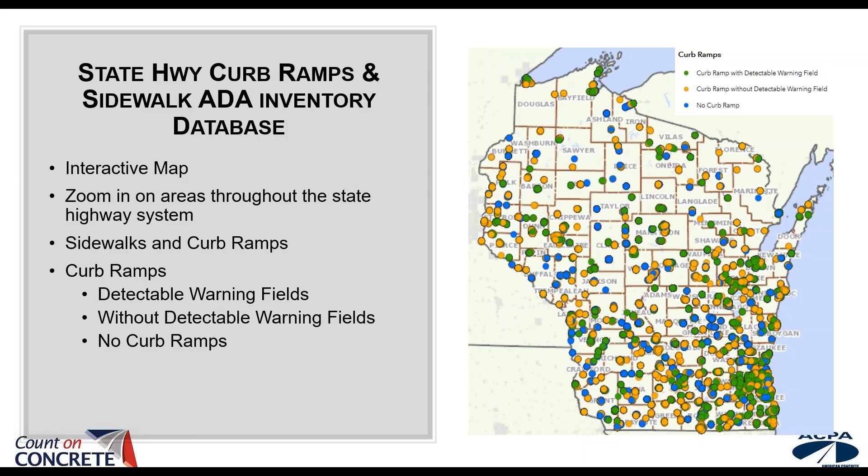The data included helps users differentiate among curb ramp features. Transportation planners also are able to use this information for insight and planning purposes.

Sometimes we need to experience things to become relatable. So if you've ever needed to use a wheelchair, crutches, or a cane, then maybe you can feel the pain some facilities can cause a person with limited mobility.

Because of this, Wisconsin implemented the 2019 transition plan. Our Secretary of Transportation, Craig Thompson, noted that WisDOT shares a great challenge with many other public entities throughout the United States in modernizing infrastructure that, in some cases, dates back generations.

He goes on to say we have established an ADA projects and compliance website for you to give input on the ADA transition plan. So as part of their transition plan, WisDOT implemented a six-year program where projects need to meet the definition of an alteration per ADA.

It's estimated that this will address approximately 6,000 curb ramp locations and be roughly about $15 million for construction costs, which doesn't include acquiring right-of-way.

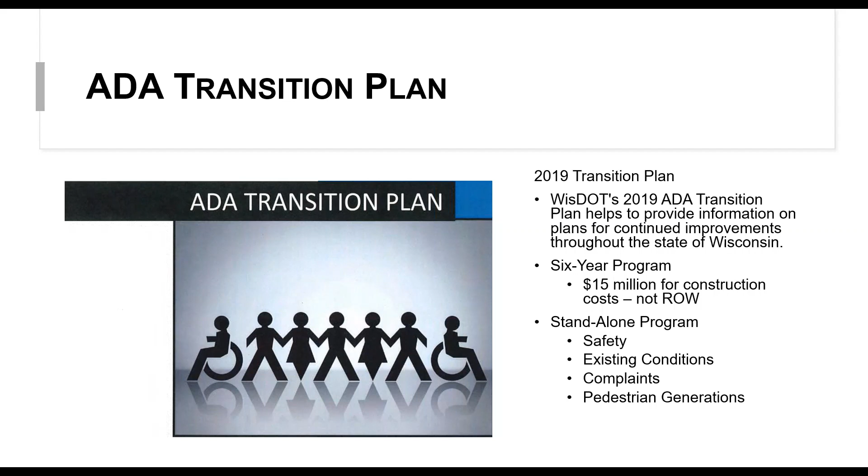Then there's a standalone program, and that's for projects outside the six-year program with prioritization criteria such as safety, existing conditions, complaints, and pedestrian generation.

Title II requires state and local governments to ensure that persons with disabilities have access to the pedestrian routes in the public right-of-way. An important part of this requirement is the obligation, whenever streets, roadways, or highways are altered, to provide curb ramps where street-level pedestrian walkways cross curbs.

This requirement is intended to ensure the accessibility and usability of the pedestrian walkway for people with disabilities. So removing barriers for travel. One place we don't usually consider a barrier is the curb.

I put this photo in here purposefully. Oftentimes we don't consider hidden or even temporary disabilities.

Have you ever injured yourself working out, or perhaps needed to replace a knee or twisted an ankle? If so, it becomes very apparent of everyday items that can become major obstacles when navigating our world with a disability.

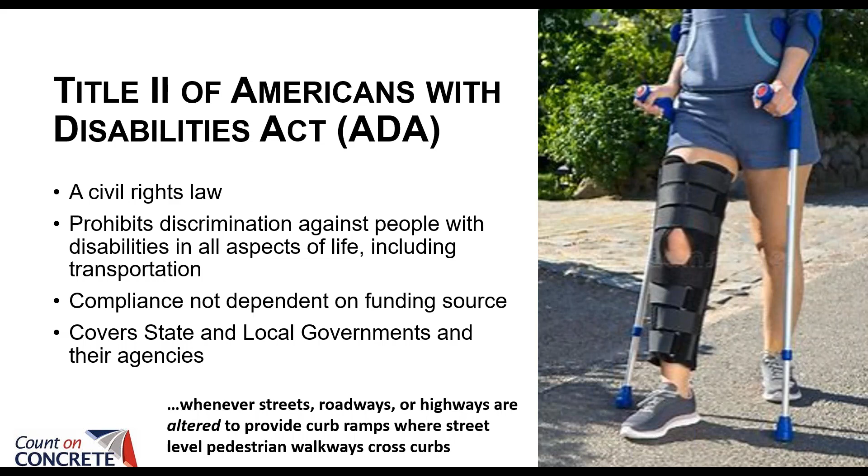So I've thrown out the word altered a few times already, and I want to dive into that a little deeper here. The guidance set forth had varied interpretations, and some questions arose regarding alteration requirements of roadway improvements, and if and when we needed to improve curb ramps.

These questions were also largely due to the development of a variety of road surface treatments, such as an asphalt overlay. Wisconsin had a front row view of what the definition of altered really meant. One of our cities had several streets that were in dire need of improvements.

In 2015, they rolled out their high impact paving program, a program to mill and overlay the entire city. When they rolled this out, they halted all reconstruction activities, which were predominantly concrete reconstruction projects, and directed all funding to the high impact paving program. In a nutshell, they overlaid a record number of streets between 2015 and 2019.

They thought that if they improved the streets, the public outcry would subside, and in general I would agree. So what wasn't considered was ADA compliance. After the first couple of years, a number of groups became vocal, and as you can imagine, it gained attention.

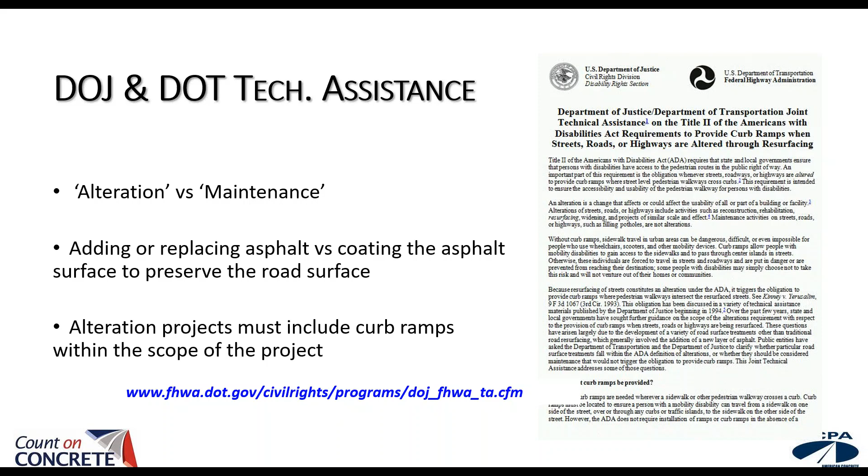I don't know all the specifics of the projects, but I know a lawsuit was involved, and several of the early projects had to go back and improve all the ramps to meet compliance. The alteration of the pavement, and not the ramp, inevitably altered the slope and then threw the ramp out of compliance. Since the suit, the design has changed and ramps were included in the alteration of the roadway.

This is what's outlined in PROWAG, alterations to existing facilities. The guidance requires alterations to existing facilities to comply with the requirements for new construction to the maximum extent feasible. Existing facilities that are not altered are not addressed unless they are included within the scope of an alteration. So altering the profile of the roadway alters the slope going into the ramp and therefore alters the existing facilities.

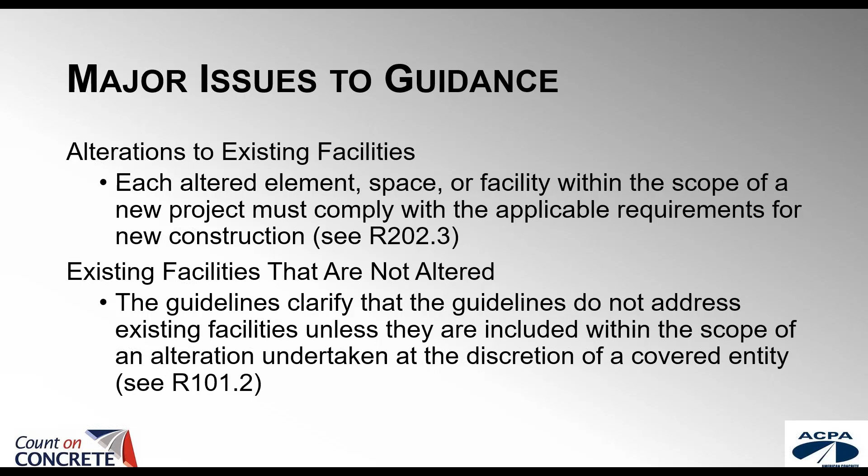Okay, let's review the guidelines for the pedestrian access route, or PAR. A minimum width of 4 feet wide - Wisconsin typically specifies 5 feet. Every 200 feet, there needs to be a space for passing that is 5 foot by 5 foot. We have a maximum of 2% cross slope.

Wisconsin uses 1.5%, and here's the reason why. On an urban construction project, one of our members was finishing a sidewalk with a 2% cross slope. The forms were placed right at 2% and checked for accuracy. The challenge arose with the finishing process. Finishing from the low end to the high end resulted in an increase of slope. In this case, the 2% slope that was verified ended up being just slightly over 2%, and when measured after operations were done, it was deemed out of specification and was issued a remove and replace order.

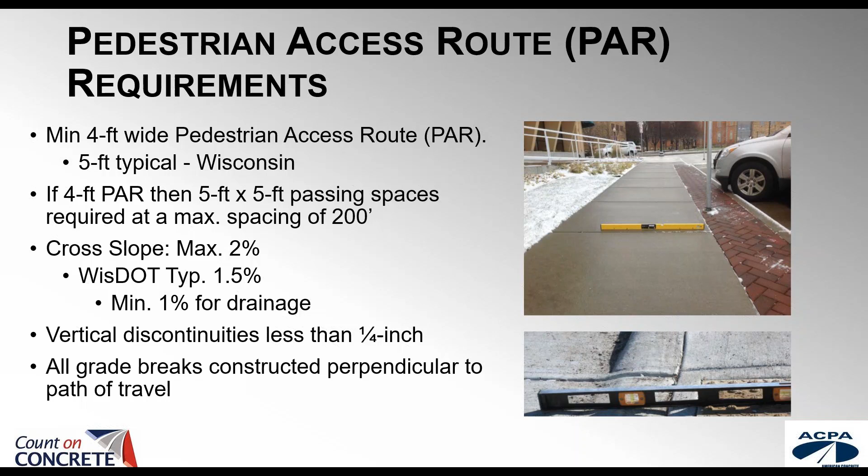Because of this example, WisDOT now details out 1.5% cross slope with a maximum of 2%. We've also found that some inspectors who may not have the experience measure a slope of 1.8% and deem it out of spec, which is inaccurate and the reason why we created that buffer. The maximum cross slope is 2% per PROWAG guidance, so the 1.8 would still suffice.

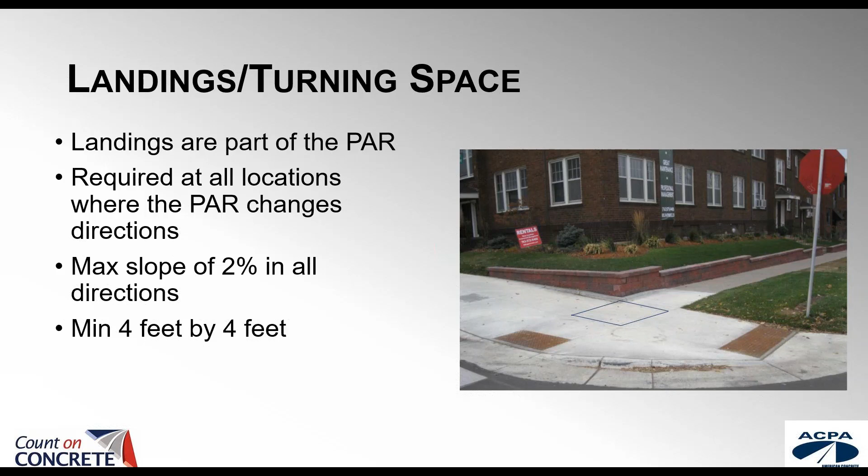All right, let's review some guidance on landings or turning space. As part of the PAR, the maximum slope of landings shall be 2% in all directions, with a minimum size of 4 foot by 4 foot as shown in this photo.

This picture shows a good example of a properly installed curb ramp that meets all ADA standards. Landing at the top with less than 2% slope in any direction, detectable warning fields installed properly, 1.5% max cross slope at intersecting sidewalks, which is the WisDOT standard. This curb ramp also has a landing at the bottom of the ramp as well.

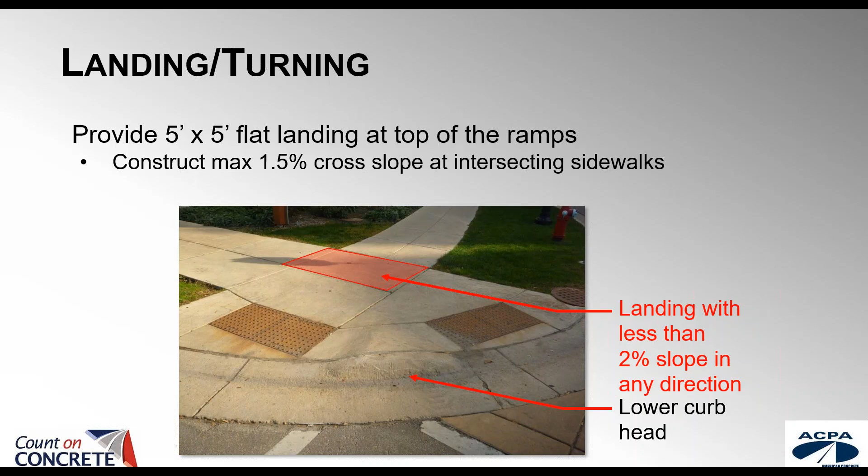This shows a nice drawing of a sidewalk and curb ramp elements. The curb ramp slope is shown at 6.25%, which is target, and 8.33% maximum. The note of special shaping right here, this gray area, is detailed out at 1.5% for Wisconsin with a maximum of 2%. Also notice a grade break is called out between the grade break and the detectable warning fields, this note right here.

The blue turning space or landing is shown at a minimum of 4 foot by 4 foot with a maximum 2% slope in all directions. If the walk is 4 foot wide, then a space of 5 foot by 5 foot is required for passing areas at 200 foot max intervals, as shown in this dark gray square here. Any cross slope throughout the sidewalk is again detailed out as 1.5% with a maximum of 2%. I find this is a really handy visual tool to keep with you.

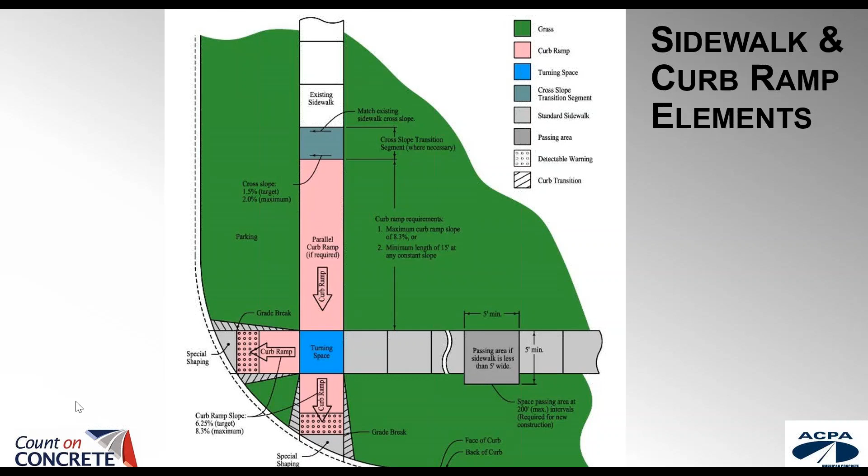All right, I'm not going to cover all of WSDOT's standard detail drawings, but I want to touch on a few to show what we have done here in Wisconsin. This is an example of what WSDOT's Type 2 ramp standard detail drawing looks like. As you can see, it closely resembles the schematic we just reviewed a few slides back.

A couple of key items to note here: we have a maximum of 10-to-1 flare specified between the detectable warning fields, which is blown up here in the circle. In addition, WSDOT specifies a minimum of 2-inch curb height between the ramps. The detectable warning fields shown here meet the requirements of 5 foot or less and therefore do not need radial plates, which I'll cover a little bit later. This 5 foot max is what I'm showing right here with my cursor.

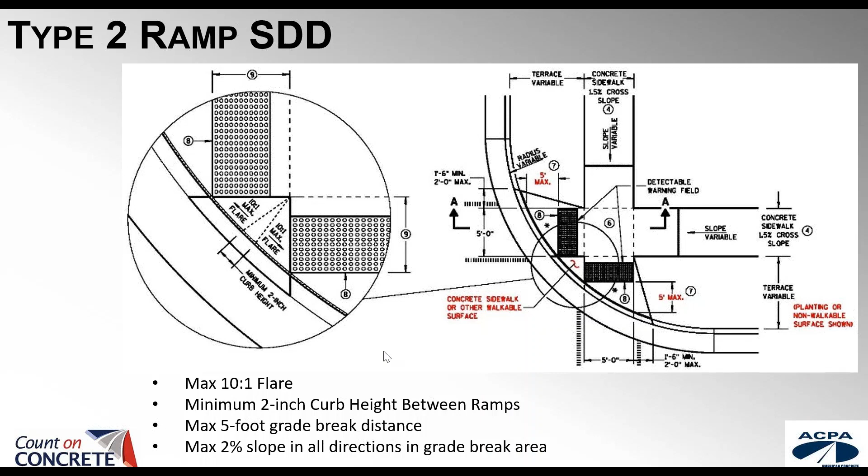Here's an example of what WSDOT's Type 2 standard detail drawing ramp profile looks like. As you can see, we have the 1.5% cross slope noted in the sidewalk location. Then WSDOT specifies a 7% max behind the warning fields and a 1.5% at the landing before it meets up with the curb. WSDOT also specifies a 4% gutter pan.

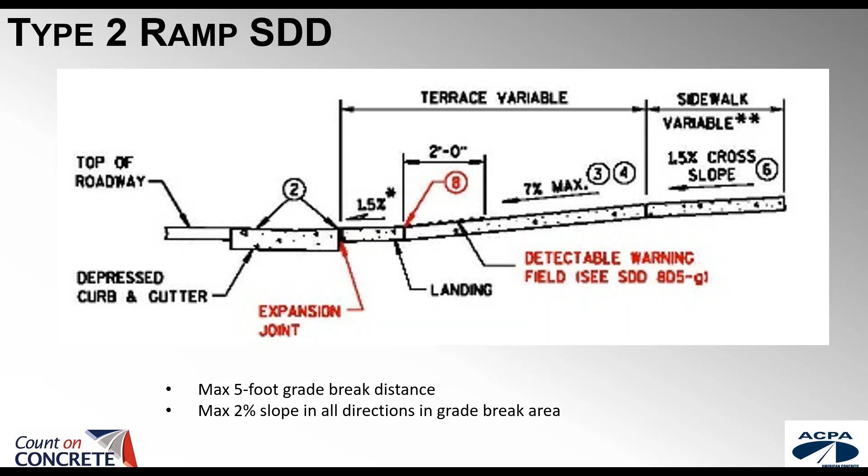This is an area where Wisconsin has tightened up specifications more than the PROWAG guidance, and here's why. The detail shown has been the standard drawing for a while. However, it raised some concern for accessibility. Here we have our gutter pan at 6.25% and our slope at 8.33%. It is viewed as a combined slope of 14.55%, which is greater than the maximum standard of 11%.

Because of the 11% maximum threshold, WSDOT has updated their details to have a standard gutter pan of 4% with a back slope on the ramp at 7%, adding up to the desired 11%. It is believed by making this slight change, the functionality of each ramp will be easier to maneuver, and thus not having that foot holder on a wheelchair bottom out at the transition point of the ramp, as depicted in the drawing here. This sharp transition has also posed challenges for trip hazards and abrupt bicycle transitions.

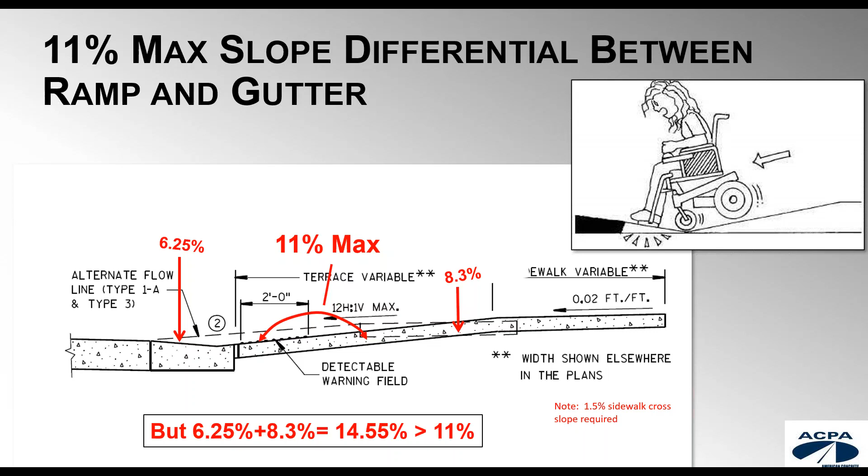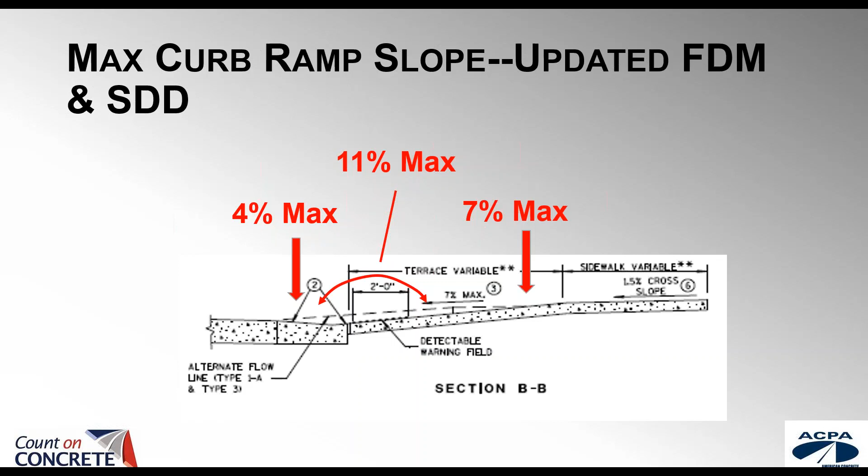Here's an updated version of WSDOT's standard detail drawing. Note the 7% maximum. Again, the change was implemented to help with construction tolerances and to better attain the 11% rollover at the gutter. Please note there is no construction tolerance for 8.33%, it's the absolute maximum. This is just a shot of the detail for WSDOT's curb and gutter with the 4% cross slope modified from the 6.25%.

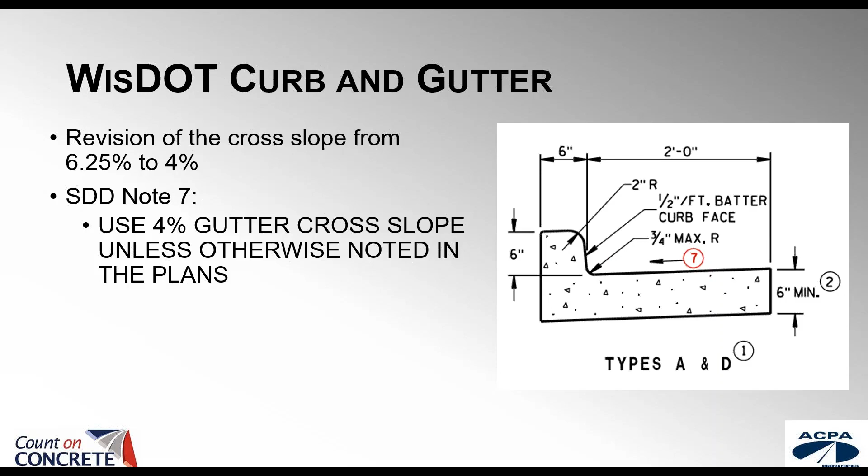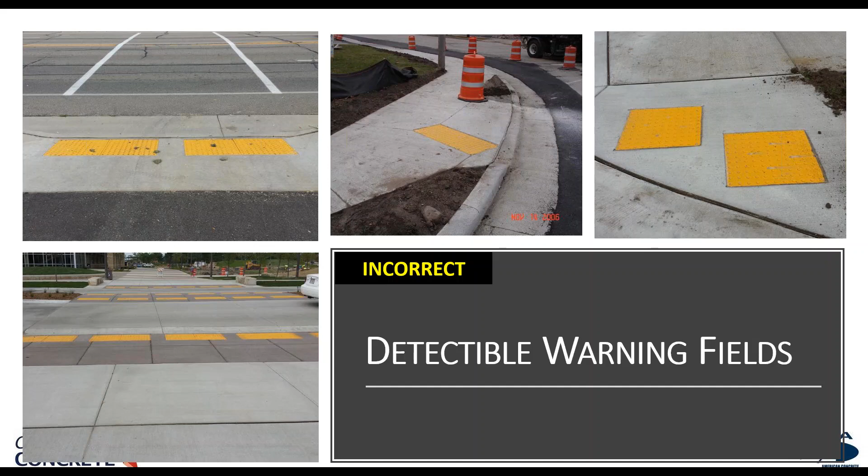Here are some incorrect examples of detectable warning field placements. For WisDOT, they typically specify yellow, but other communities choose to use other colors like white, red, or natural patina or rust colors. The alignment is parallel to the direction of travel, placed at the back of the gutter pan. The directional ramps shown here all fit into the regular detectable warning field criteria, where they maintain 5 foot or less to the back of the gutter pan. Again, the standard detail drawing has been updated with a 5 foot dimension.

It's important to have curb ramps laid out in the field before the curb is formed. By doing this, you can achieve proper widths at the pan and adequate slopes per specification. Also note this curb lip here would need to be checked. The lip must have a consistent slope with a max of 1/4 inch. Layout also helps ensure that we're providing appropriate lateral clearance to utility poles, hydrants, streetscape elements, or signing, and exposed bases, to remove them from the pedestrian access routes.

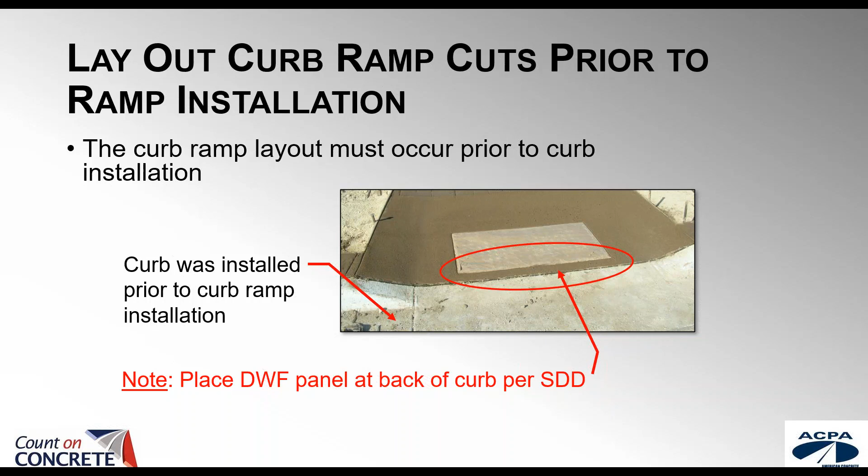I know Jesse had a couple really good examples last week for that as well. Everything ties together in the end, so it's important to coordinate all items and to have a really good, successful project.

Here's an example of staggered detectable warning fields. Wisconsin no longer allows this staggered pattern, as WisDOT has moved to radial plates.

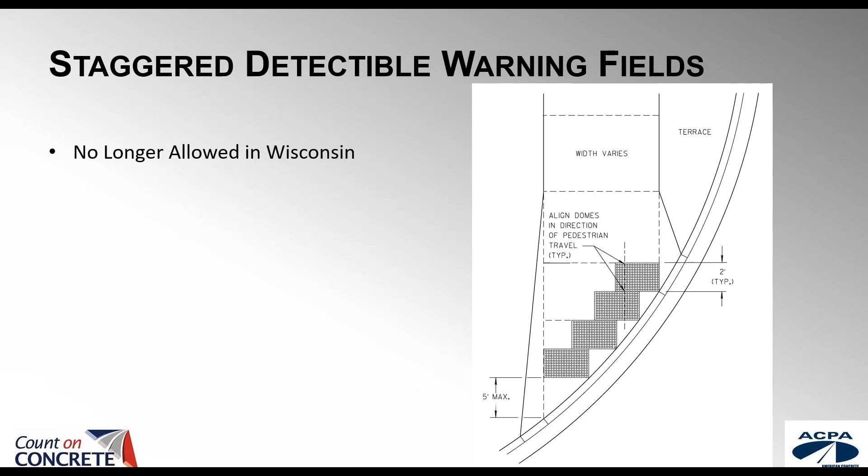Okay, radial detectable warning fields, or radial plates. This is the standard detail drawing for WisDOT's radial panels. So when are they required? When the grade break distance is greater than 5 foot from back of curb to the start of the detectable warning field. So if you haven't seen them installed before, they can be tricky, but not impossible.

As you can see on the outside edges, they are not standard sizes, so they would need to be field cut. It is recommended to avoid cutting through the domes, but if you've ever seen these done, that can be difficult. We've received feedback that this is maybe challenging. It's also recommended that each contractor have the appropriate tools on hand to grind off the sharp edges created by these field cuts. As you can imagine, having any sort of sharp metal is unacceptable, as it could puncture bike tires, damage bare feet, or etc. So care must be taken to eliminate this.

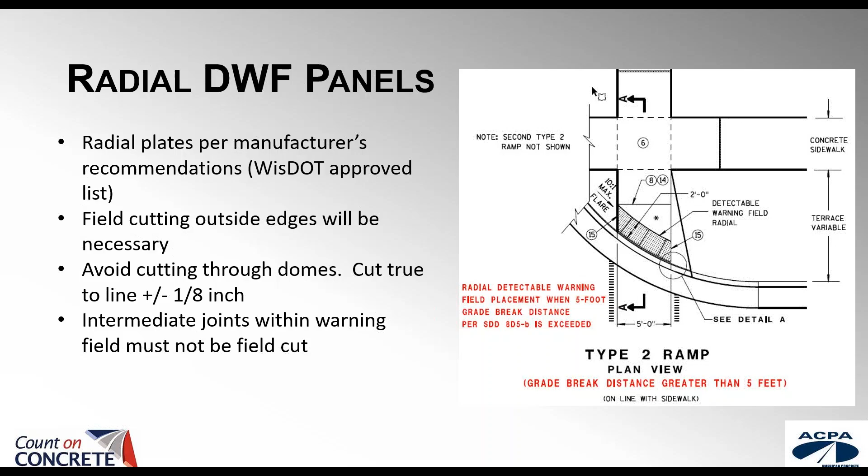Here's a closer look at the detail. The sliver of concrete between the back of curb and the edge of the radial panel is specified to be no more than 3 inches, with a variability of up to 1 inch. As a past inspector, this question came up a lot, so it's nice to have clarification in our standard detail drawings.

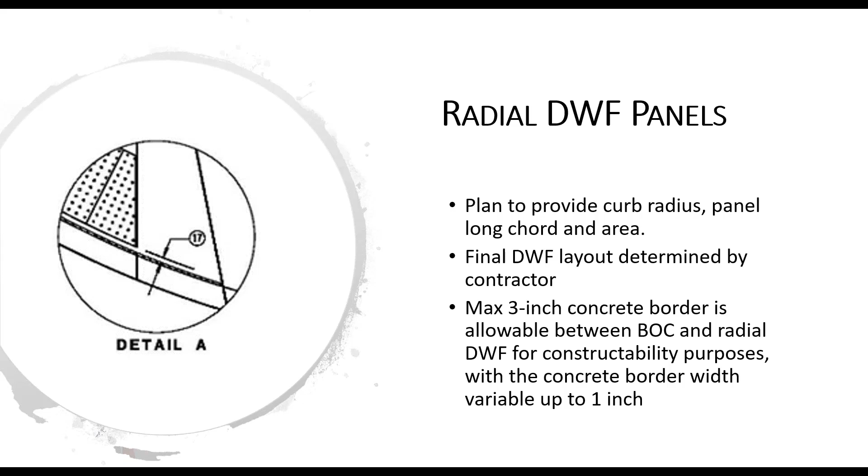Some things to keep in mind: the grade change between the gutter slope and the ramp should be no more than 11%. WisDOT's maximum gutter flag slope is 4%. If you were on the webinar last week, Jesse went out in the field and operated a wheelchair. If you saw that, you'll remember that the slope of the curb head opening is a big deal in the ability to maneuver the ramp.

A 7% slope max is specified here. In the northern states, where temperatures get into the freezing zone, we need to be sure we have drainage around the curb and away from the curb ramp. Having water and ice at the bottom of the ramp can be very problematic.

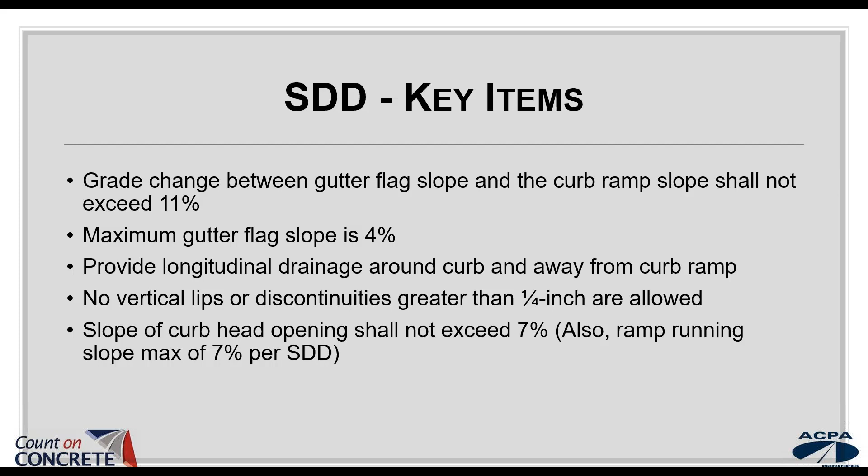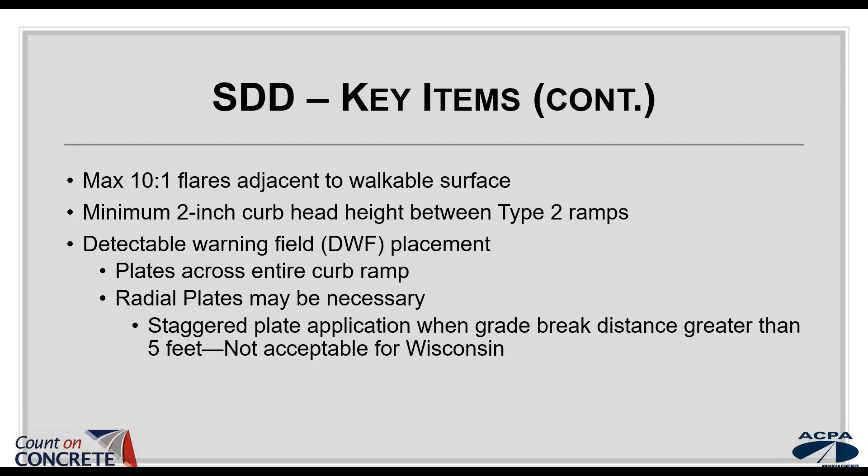The flares between the ramps need to be a max of 10 to 1, with a 2-inch minimum curb head. Detectable warning fields need to cross the entire curb ramp, and take care when installing field-cut radial plates. Stagger plates are no longer acceptable in Wisconsin.

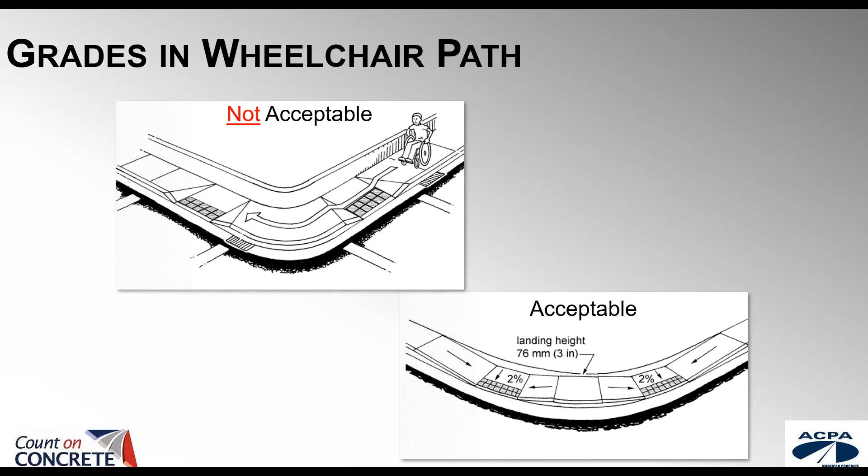In my experience, sometimes the small spaces we are given out in the field just don't work. If that's the case, sometimes we need to go back another panel, or take an extra panel out, in order to lower that portion of the walk. By doing this, we can achieve the desired maximum slope requirements.

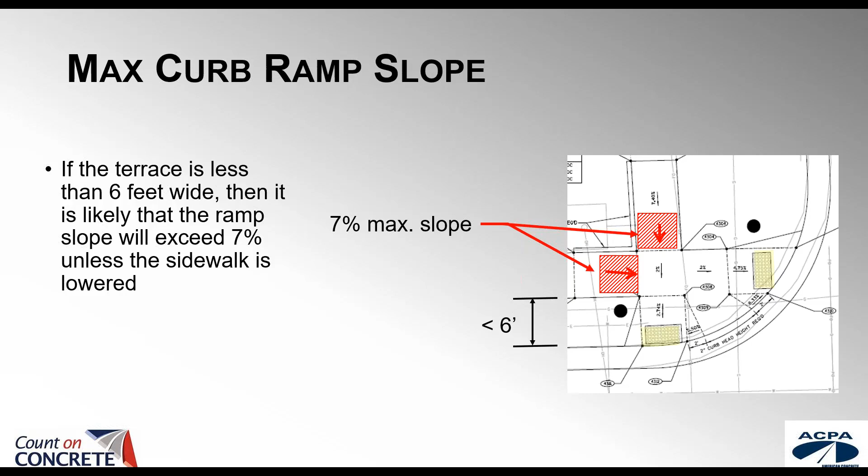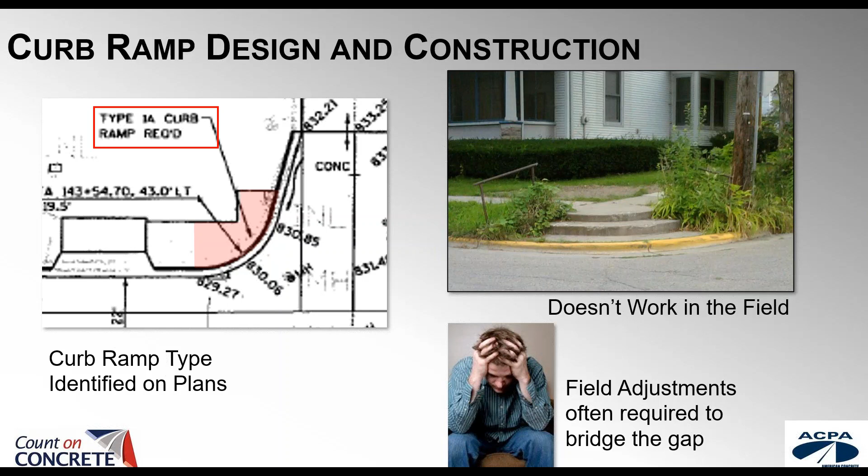For this layout example, we have simple callouts for the type of curb ramp required. By doing this, we are having most of our contractors and field engineers doing the ADA field design. It also doesn't allow for vertical consideration to be incorporated in roadway design to match field conditions. So where are we going in Wisconsin?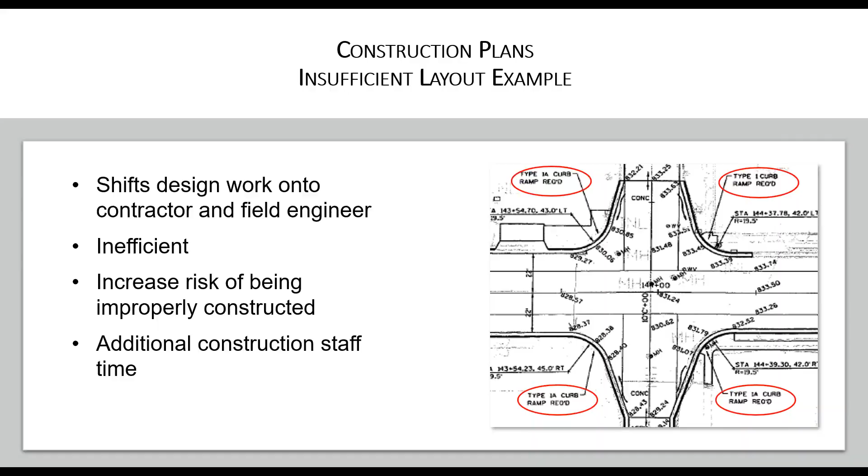At the end of 2017, WisDOT added a curb ramp staking bid item. The intention of this item is to make it simpler for all parties. When this was presented to me, I was personally really excited about it. I will admit we've received a variety of feedback from both WisDOT and contractors—some like it and some don't.

This is why it makes sense to me: if the grades work on paper with the amount of acquired right-of-way, then even if the curb is placed higher or lower than planned, a simple adjustment can be made in the field to make the ramps work. With all this information, the quality of the survey and as-built drawings are imperative. If either of those are inaccurate, then the design and layout will be off, and we'll be back in the field scratching our heads like we were before.

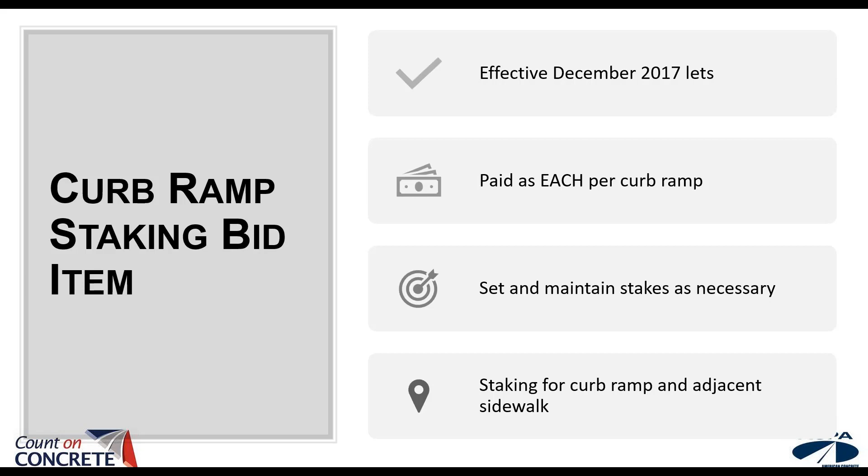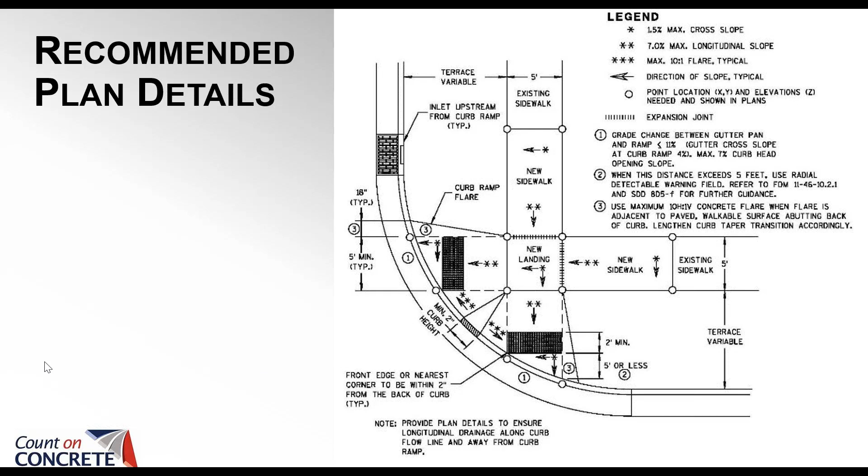I think it's imperative to understand that when contractors come out to install these ramps, they are given one sheet of paper for the ramp. They do not get the entire plan set. I can understand why this happens. If you have inspected or worked on an ancillary crew, you don't just stay on one job for the entire summer or season. You're hopping from job to job when they're ready for you. Because of that, typically you get your sheets and head out to build your ramp.

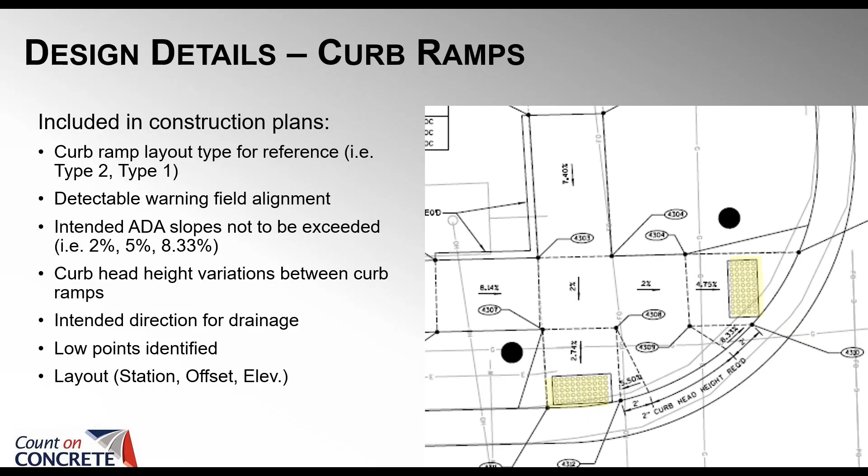I think we all need to work together to make the job as smooth as possible, from the survey to the designer to the hands-on contractor.

Here's another example of a detailed layout with sufficient information. The XYZ coordinates are very helpful but not essential. Station and offsets will also work. In order to meet the ADA standards and construction tolerances, we need some detailed information like elevation and grades. This will be especially important on alteration projects like resurfacing or preventative maintenance, particularly in urban reconstruct projects.

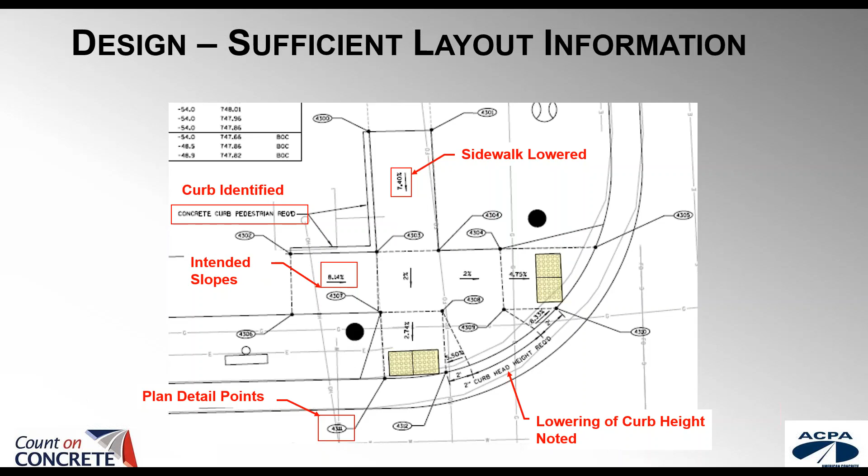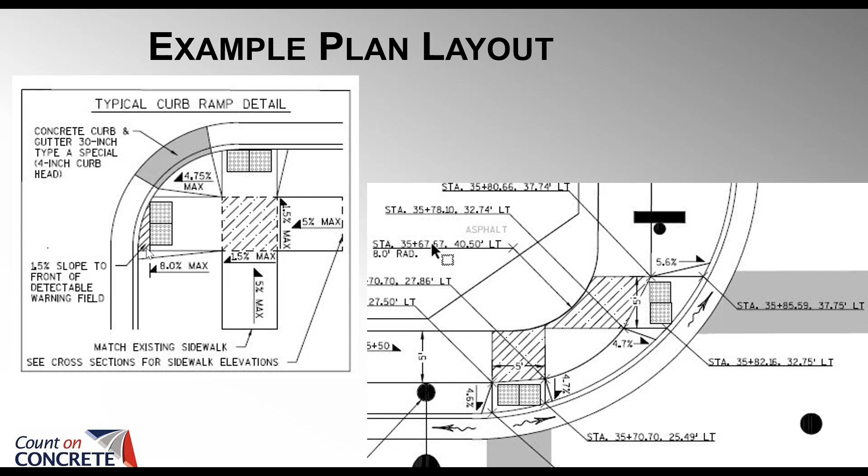Here's an example of pulling all the details together. It's showing the station offset of the areas that need attention and laying out the direction of flow as well as percentages throughout the drawing. The drawing on the left is even noting the 1.5% slope from the detectable warning field as required guidance from PROWAG, which I'm talking about right here.

I'll tell a quick little story about my father. He broke his leg on a construction site and had several surgeries to get him back to walking again. It became very apparent to him, myself, and my family how quickly one will understand on a personal level how important these placements can be.

Just moving a walker up a steep slope or a deflection in a curb can be extremely difficult to maneuver if you have a disability, either permanent or temporary. Now, me as a mom, when my kiddos were little, getting the stroller in and out of places was tricky as well. Fortunately, I could lift the stroller up and move it around, but some people simply don't have that luxury. I think Jesse did an excellent job demonstrating this in last week's training.

Sometimes we simply just can't make it work, and in these instances, the designer can lower the sidewalk and or possibly add a pedestrian curb. From a monetary standpoint, this option is obviously more expensive, so we have additional material, labor, and time needed to complete this.

We hope by requiring the designers to identify these problems with the survey in advance, they will be noted properly in the plans and therefore bid appropriately by the contractor, saving time in the field as well as all the paperwork that can be involved with potential change orders. I know all change orders can't be avoided, but if we can plan properly, I truly believe some can be. And one less change order I would have to write is good for me.

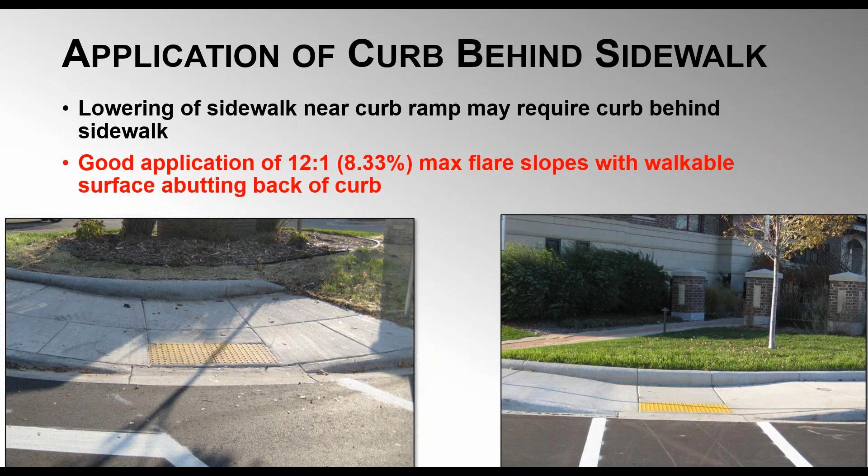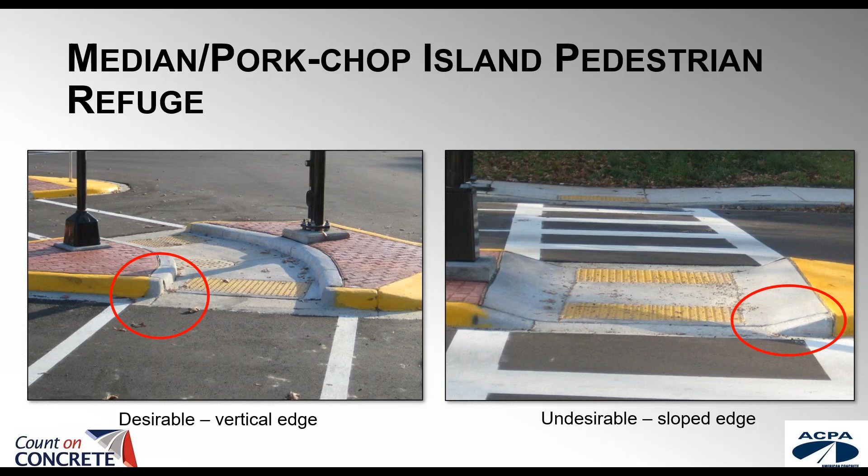I've included some additional resources if you want a more detailed look at what WisDOT is doing with their ADA programming. With that, I'd like to thank you all for your time and pass it along to Jesse Jonas to wrap up the series on our ADA webinar training.

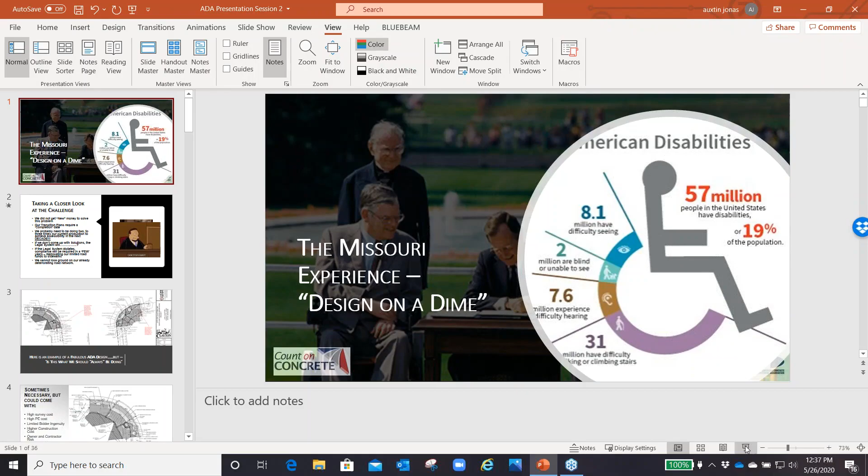Thank you very much, Jackie, and thank you to everybody on the line with us today. If you joined us last week, you had your chance to boo me off stage and you didn't take it, so I'm back for an encore performance.

As you look at this picture, this is George Herbert Walker Bush signing the ADA into legislation in 1990. So we've helped a lot of people since then.

Something else I'd like to note, as you saw in that presentation how Wisconsin is constructing and building their ADA facilities in accordance with their rules and the rules in PROWAG, you'll note, as Jackie did, some of the things they meet or exceed the PROWAG rules on. So just remember, as we present the PROWAG rules, those are minimums, and each state certainly has the right to make different features within that pedestrian access route a stricter compliance standard. Jackie did a fabulous job pointing that out.

Taking a closer look, we know we didn't get new money to solve this problem, and we also know we're sitting on a completion date for our transition plan. So those two things mean we need to get moving, and probably we need to do a little bit more than we've been, which is a challenge given the system's current needs.

Right now we've got roads and bridges with more needs than money, and we know that if we don't handle this within our capability and understanding of the rules, someone else will dictate it for us, as has happened in other places. It's really important that we take our destiny into our own hands, because we don't want to end up in consent decrees where we have to take all of our resources away from the multimodal system needs and put them all into one.

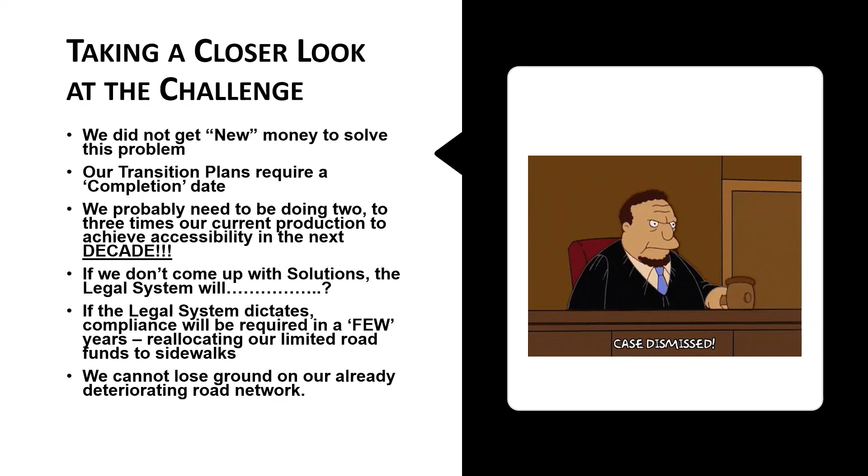If we take that initiative now and invest, like Wisconsin is, a percentage of that budget each year into upgrading the facilities, we can do so over the course of a natural progression, touching our projects on each road. With that said, we're going to talk about a Missouri experience today.

Now, not everybody in Missouri is doing this. Like Jackie said, you walk down the aisle and put some things in your cart, but you don't necessarily put everything in. This is an example of what we've been doing to flex our innovative minds and come up with ways to increase our ability to put more accessible facilities out there.

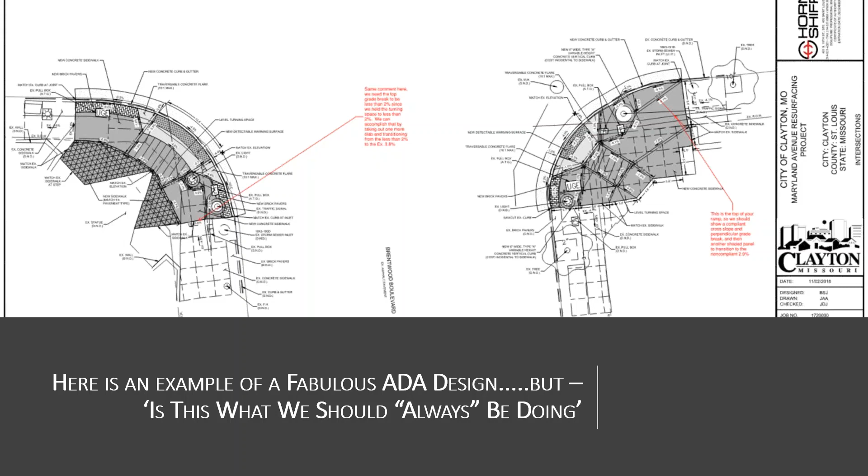Now you look at this beautiful intersection right here, and I was part of the design, layout, and scoping of this. But the question begs: do we do this for every single one?

As we zoom in, we have some real tight right-of-way out there, and everybody on this line knows about intersections where you have subdivision monuments, poles, lights, landscape, some very decorative facilities, buildings. We're dealing in tight spots, and sometimes, yes, this level of survey is required.

But as you look at that shading and those percentages, that takes a lot of additional survey time and a lot of additional PE time. As a consultant in a past life, it's hard to scope out your scope and fee for ADA compliance when we're designing to the nth degree, because sometimes it ends up taking so much more time than you ever imagined. I think everybody on the line is probably experiencing that in some way, shape, or form. And then we also end up with pretty high construction costs if we're building these big, huge, built-out facilities.

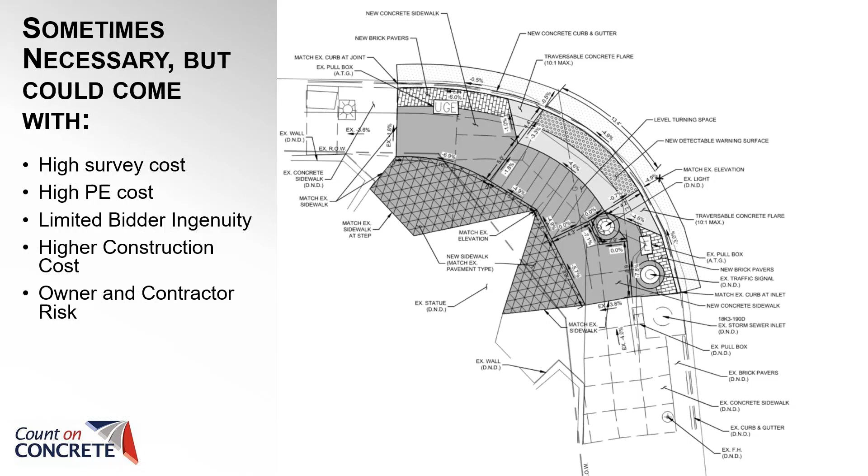In some versions, we call them Cadillacs. In other versions, they're absolutely necessary for compliance. But look at that last one, owner and contractor risk.

So I get asked the question, but didn't we design to the nth degree to take that away? This is just experience of mine and a lot of my colleagues around the Missouri area over the years, and my background's in construction as well. So we get some really good designs and a lot of detailed information telling us exactly how to go build it in the field.

And when we go out there, remembering that a lot of these ramps require cuts. As a construction engineer in the past, I often told people, well, I'll know what my budget is once I'm done digging. Until then, anything's up in the air, because when you're digging, you have no clue what you're going to find. And that's so true on these ramps, because we're dealing with a lot of different slopes, grade breaks, obstacles that we need to have clear space around, all in this small space.

So as we start digging, you see that there's a light standard in there, and there's a signal pole in there. That means there's conduits under there. And as we start digging, quite often in these ramps, with the detailed design, we'd end up running into these obstacles. Sometimes you find underground utilities that you didn't know were there.

And did survey pick up absolutely everything? Because absolutely everything is required if we want to make certain we can build this exact ramp exactly as shown out in the field. And what we ended up finding in Missouri was quite often we needed to move something. A utility was in the way and we just had to move the ramp. Once you move these things one little bit, everything changes.

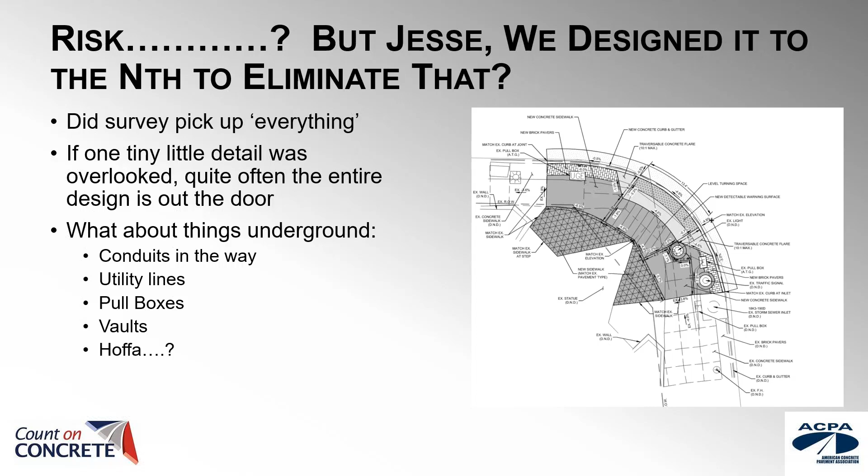So now you need that knowledge in the field on how to build these things to compliance, even if you invested all of that front money into the ramps. So that's why we say sometimes this is required, but if there's another way, if there's a more efficient way, we're all for it. And that's what we kind of explored throughout the last decade, I would say.

So you've got three different ways you can go about it. You can go super detailed up front and maybe even do a SUE investigation. Then you could be certain that you could build that ramp as detailed. But really what we're going to talk about today is a version of a rough survey. Now this is a little different than what Wisconsin's doing. They're into more detail, and we're going to talk about a version of doing a rough survey, but the parts that make that possible.

So these are just things that maybe you find some merit in and take back and start considering for yourself. And then there's that last one, design build project. So we just had a project recently that was planned for design build for improving ADA corridors in Missouri. It's going to be on hold right now because of the COVID situation, but basically ADA is this ultimate design build challenge. You go out there and see what you got, and then you design something based on what's going to fit in that area.

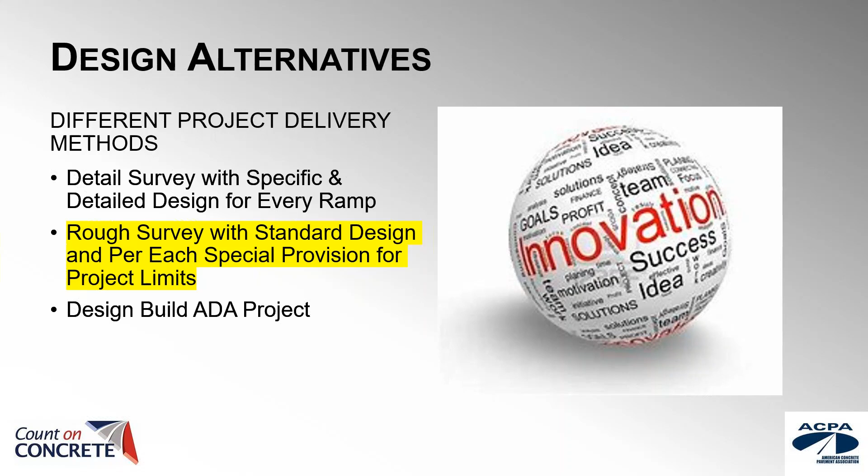That's why we talked in session 1 about putting these in piece by piece instead of ramp type by ramp type. So we will have a design build project. Our state does allow it, we have legislation allowing design build. And they may throw in 50 corridors and see how many they can get for X number of dollars. I'm not sure what the package is going to look like, but we'll certainly have more to talk about on that in the years to come.

So how do you make this work? And believe me, it came with growing pains, tweaking, improving along the way, but about 10, 15 years ago, we sat down with this realization of how can we get this a little bit more affordable and still meet compliance, and not have a Cadillac per se or an overdesign. So we started with this special provision. We decided we needed a good special provision. We needed good, modern, updated standard drawings, which came with the transition plan. And then we needed an understanding of what level of survey is required in the field.

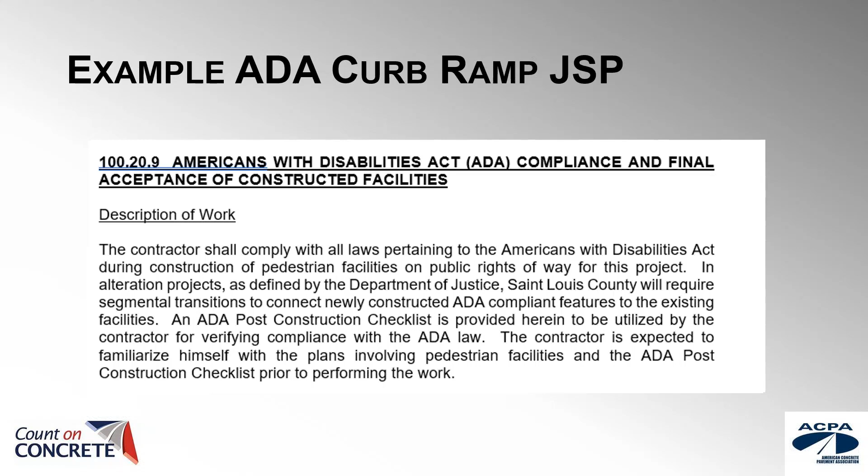So in this curb ramp special provision, this first part says the contractor shall comply with all laws pertaining to the ADA. In the state of Missouri, most cities and counties are including a checklist into their projects, and that checklist largely has the rules of PROWAG listed in it. So everybody building this knows the special provision tells the contractor to be familiar with that checklist included in the contract. At the end of the job, we're going to accept based on it, so it gives them an idea of what acceptance is going to be based on. And here we give the link to it.

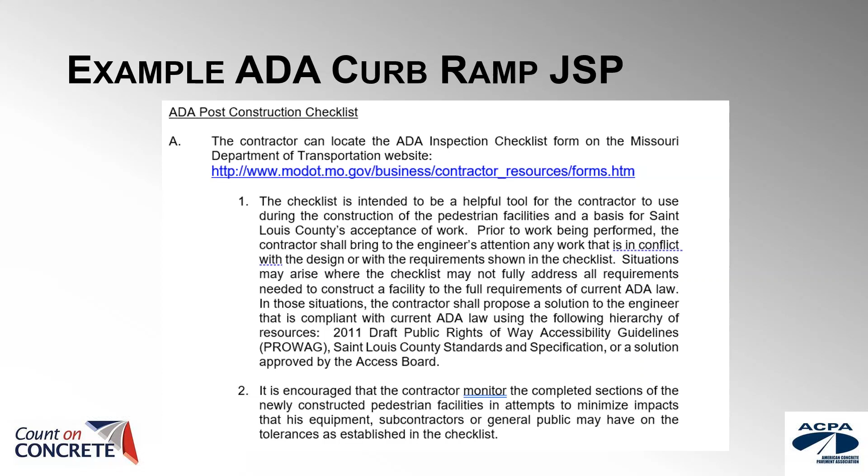This part is out of St. Louis County's special provision. It goes into detail about the segmental transition, which we talked about last week. When you're connecting a compliant built ramp to a non-compliant part of the pedestrian access route, we need to connect the dots because they don't match up otherwise. These transitions are how we do it.

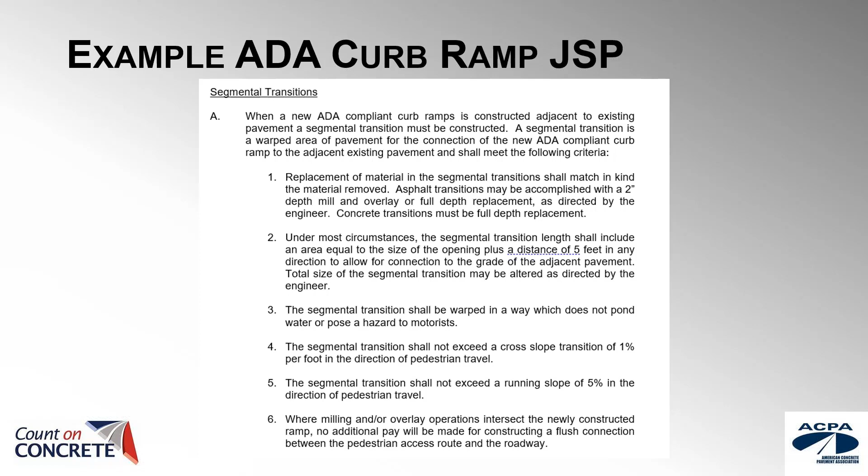PROWAG tells us about that, and here we give some rough guidance to the contractor about how that will be done, whether you're tying into an asphalt side street or a concrete side street. Certainly, if you're rebuilding the entire approach as part of the project, then you don't have a transition, because you'll take that to compliance and your ramp will meet right in. But we want them to know what the requirements are. You see that slope in number 4 there, the transition shall not exceed 1% per foot, which we talked about last week as well.

We also want to note the coordination of construction. It's imperative that the contractors submit to us their plan for reconstruction, because we have to keep a lane of traffic open for pedestrians during construction, and it needs to be in compliance as well.

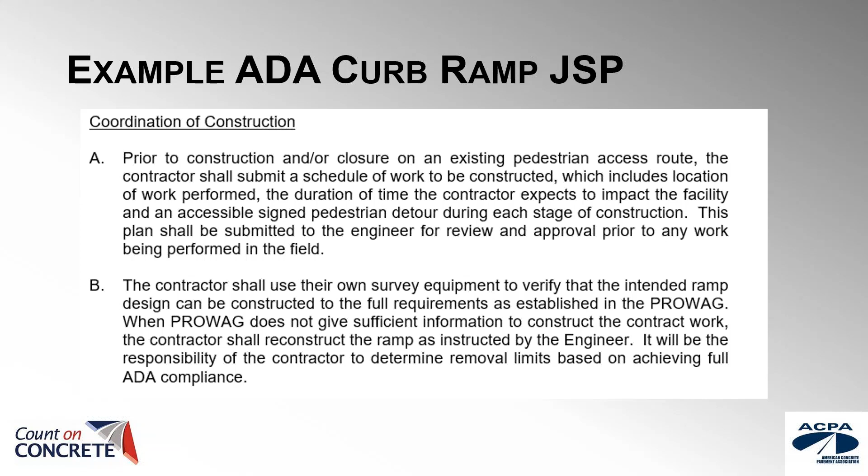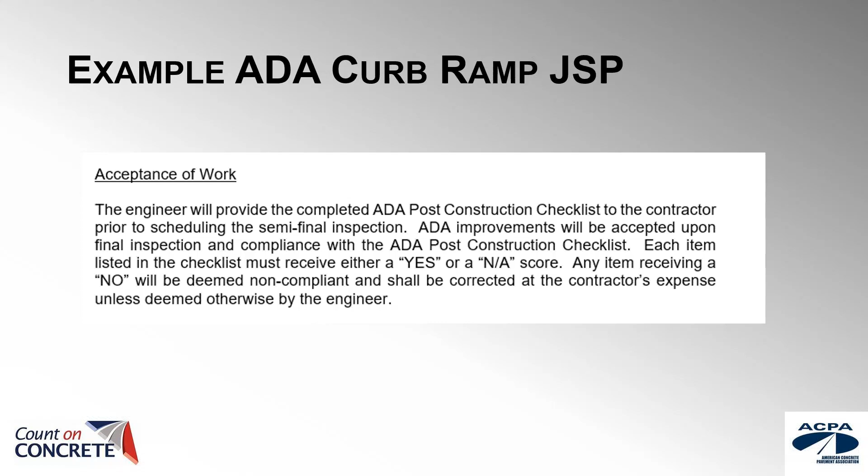Then you get to the acceptance of the work, and in the checklist it's a yes or no: did you meet the rules? We specify in that checklist what the rules are. So you've got a special provision telling you what to do, you've got a checklist saying what PROWAG spells out, and we go out into the field — that's our compliance acceptance method. So what's included in a per-each ramp?

Well, you've got to spell it out, and it may be different for you. For us, item B says the per-each ramp price shall include all costs associated with removal of existing materials required for new construction, as well as the landings, the flares, and return curbs if needed. All of these are 'if needed' because we're opening this up to a little bit of contractor ingenuity. So instead of just one mind on paper saying what needs to happen, we've got a lot of them out there, all the way from the contracting team to the design team and the inspection team.

And in that segmental transition, we do need to cap it at a certain amount, just so we can get an honest price per ramp. Right now we've got a 5-foot distance in any direction from the ramp included in this per-each item. If for some reason we need to go past that, we put a contingent item price in there, or you could put a fixed item price in there — there are a lot of different ways you could address that, or you could just say it's all part of the per-each, however you'd want to go about it. But we decided to take some risk away and put some fixed numbers in there.

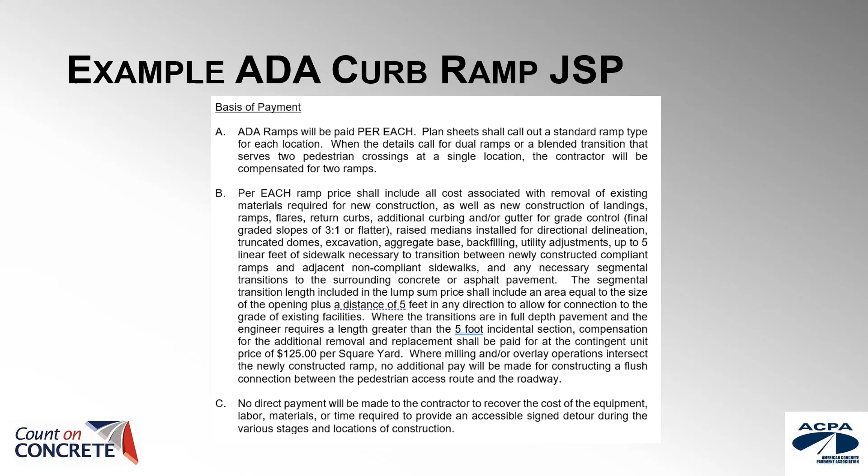So for per-each curb ramps, what's in it for the agency? This is really important: you're getting a fully compliant ramp, because you've made the decision that compliance knowledge needs to be in the field and in the design team. So in the field, you've got contractors through training and annual projects, a group that's built thousands and thousands of ramps with a lot of compliance knowledge.

On the fly, we can make a move if there's a conduit in the way, a pole that wasn't picked up, or an underground gas valve that would just take too much time to relocate. So you've got knowledge out in the field, and a very sophisticated team looking at this all the way from design through building. And then you get much cheaper design — you'll see how we do that here in a second as we get to the standards.

You're going to get grade and restoration control. That's basically saying that you're putting per-each costs in, and that way they won't store excavation off to the side, creating a bigger restoration area. They may have a dump truck on site so it can be hauled straight away, minimizing their footprint.

Transitional segments if needed, the detours included, split and dual ramp. So if you're doing a double intersection, make sure you're counting those as two, even if they are one big opening that stretches two crosswalks. If you're doing two crosswalks, you have two curb ramps in that area. They may be combined, but put two each because the work there is double.

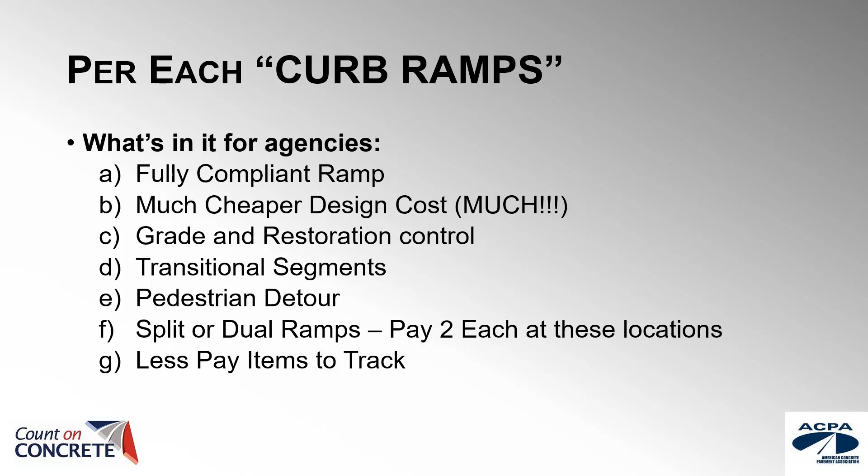And you've got less pay items to track, so your inspectors are going to certainly thank you for that. We used to track 7-inch concrete down by the street, 4-inch concrete up on the ramps, all the different kinds of curbs that might be there, domes by the square foot, restoration. You spend more time tracking and counting and worrying about quantities than sometimes just watching the overall compliance going in. This one per each is creating that flexibility and that openness to just focus on the compliance side of it.

And then for the contractors, they get the layout and innovative flexibility. They're going to get paid for the work they do per ramp, and the better they get at this, the lower that price is going to come. So we've seen that in Missouri, whether it be state or county. The price has come down as they've really begun to understand fully the rules and PROWAG and the allowances and the checklist and how to put these things in piece by piece. If something's not right, they can work really quickly to come up with an alternate solution.

And 3-to-1 slopes, so if they don't need curb, they don't put them in, and around here that's about 30 bucks a piece, and less 7-inch concrete, that's a savings.

So we're going to go real quick through some standard drawings just to give you the other part of it. If you're going to do per each, you're going to want to have some very current standard drawings that are easy to follow. So what we've done here, these are St. Louis counties, and I'll zoom in on it.

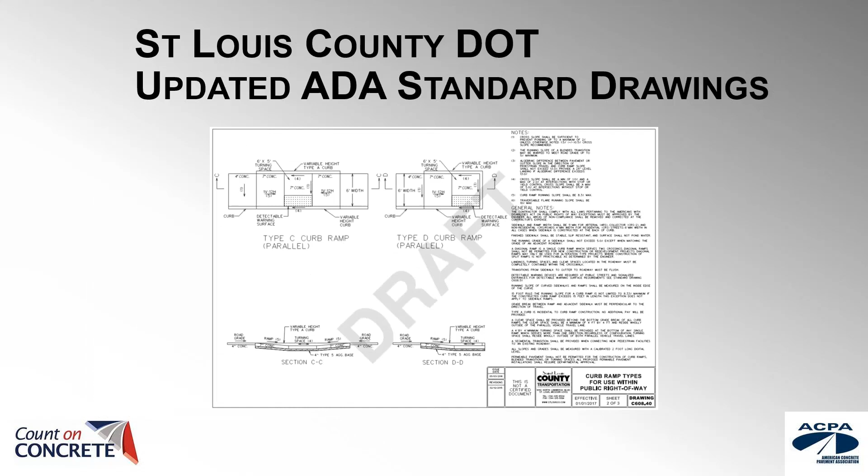So you've got two perpendiculars there, a type A and a type B. One has a green space and one doesn't. These are very common perpendicular ramps we see in the right-of-way. Going into the parallel side, you've got two kinds of parallel ramps: one where two paths come in, one where you're a single path coming in. We call those type C and D.

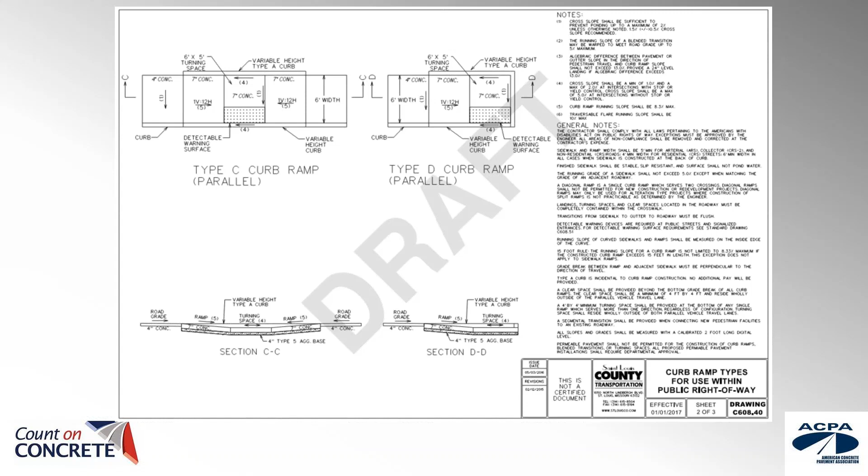So this is some high-level information. Now we go into the blended transition where you've got a 5% max slope that goes up to a turning space. And if you notice all the notes on the right, they're all the same for each of these. They note where you're allowed 2% max cross slope, or you're allowed 5% max cross slope. We discussed that last week where those places exist. And then some other general notes that are specific to county requirements.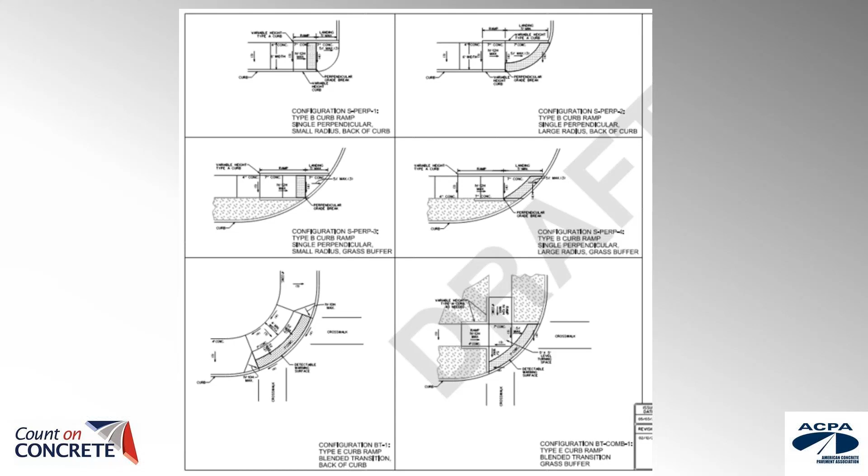These are going to be on your larger radiuses. So you can kind of start to see, if you got a large radius out there, your designer can walk out in the field and say, we're going to put the domes on the ramp, it's a big radius. Or we're going to put the domes on the radius because it's a big sweeping radius. So they can call right out S perp 2. Or if it's a tight turn, odds are really good we'll get that one in. And then we drop down, you got the green space, and then you got your blended transitions below it.

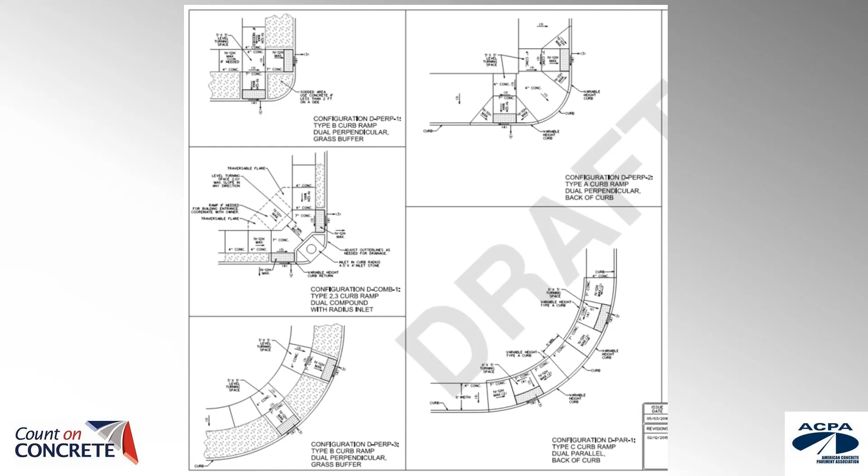And then we get into dual ramps. Here's where they're clearly dual, where you got a green space in between, could be an island, or you may have flares, as Jackie's picture showed. And in the bottom, you got double parallels, which are quite common. So we know when we've got sidewalk at back of curb, we can almost always fit in a compliant ramp because we're dealing with parallels. And thanks to the 15-foot rule we talked about last week, chasing grade isn't what it used to be.

And here we got a couple more. So these are all well vetted. A whole big team got together at the county to discuss this, from traffic engineering to design, construction, to planning, and even shared it with local resources to get their inputs on it.

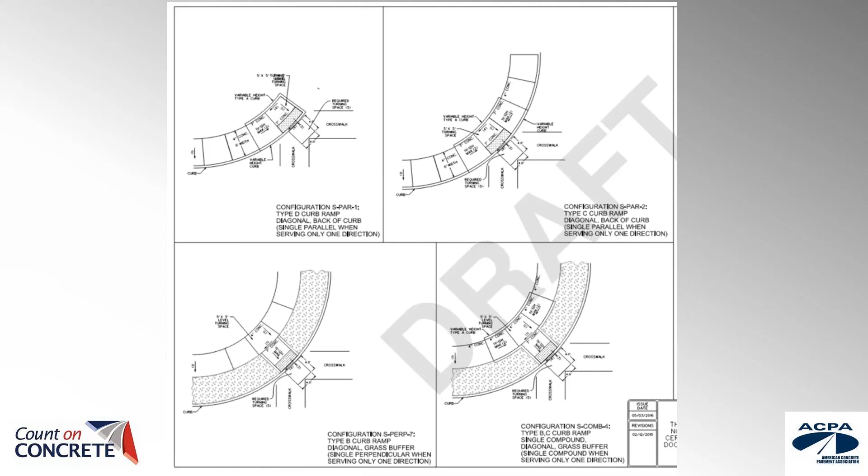So these are current and modern ramps that for the most part, we can go out into the field and say, generally speaking, this type will work here. So you have your per each JSP, which is necessary to call out what's all inclusive, and then current standard drawings and a naming convention that works for you, so your design team can walk out there at the preliminary design stage and say this one's going to fit here, this one's going to fit there. Getting out there and walking it is absolutely critical to making this work.

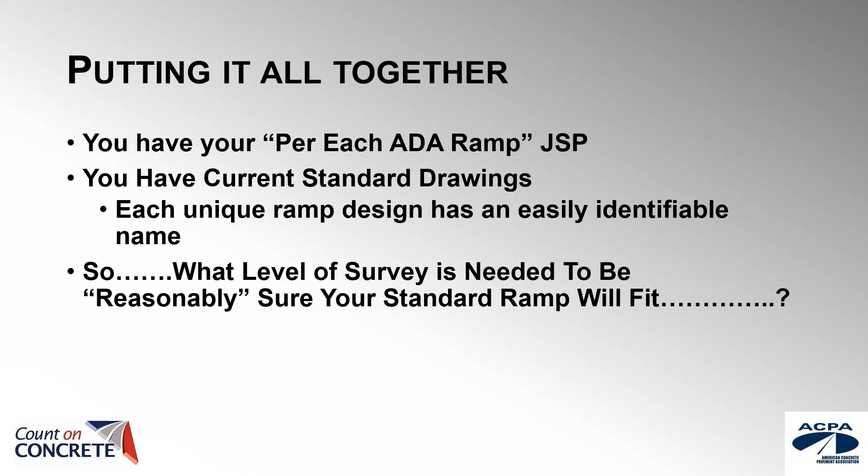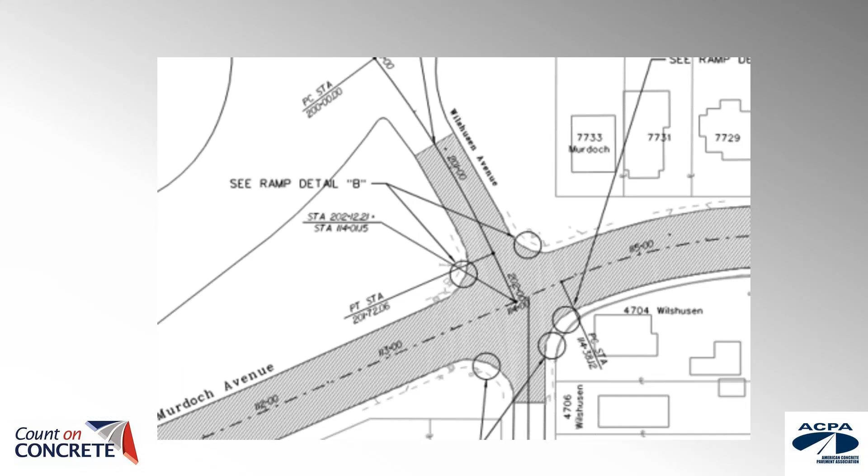So what level of survey is needed? Here's where we're at right now. This has been working very well for about a decade now. As we go through our rehabilitation plans, we just note out where ramps are, and that will take the bidder and the builder to the ramp detail sheets. Notice here on those sheets, we highlight the areas for removal.

These areas are another level of training for our surveyors. When we know we have 5 to 10 foot openings at these locations, if you go 15 foot to either side, you've got your 15-foot rule into account. Most of the time, if you get survey points within that range, you're not going to have to remove more than that in construction. And because the engineer or contractor is allowed ingenuity, quite often they can remove less and make these a little bit more affordable in their bid prices.

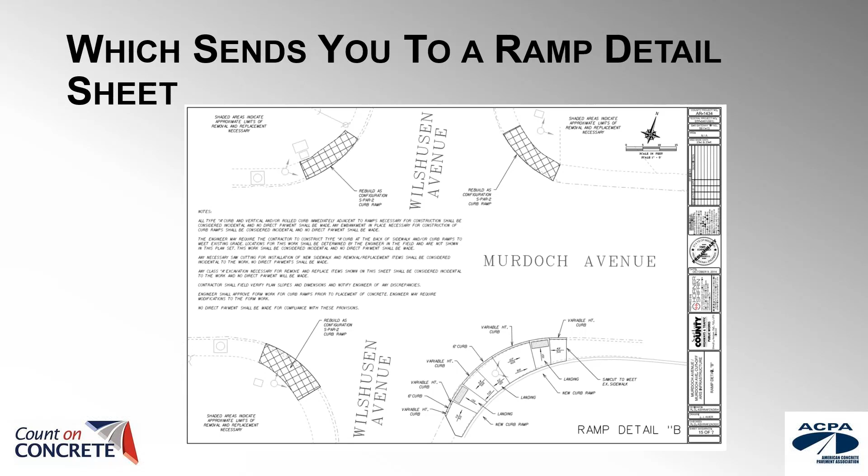But notice in that bottom right-hand corner, the team didn't feel comfortable just shading the area—there were enough obstacles that they wanted to give a specific plan for that location. So it's not for everywhere, but if you can get a cheaper upfront design cost, a more predictable scope and fee for the consultants, and ingenuity from your contractors to help bring down the price, it can help get more ramps brought into compliance each year. If you only have X number of dollars but now can do a third more of them, that's probably a good thing. And since we all have transition plans, it's a necessary thing.

So super fast to end this, I'm going to go through just a little example of how I look at a site when I go out there as a construction engineer, contractor, designer, to see what I'm going to build.

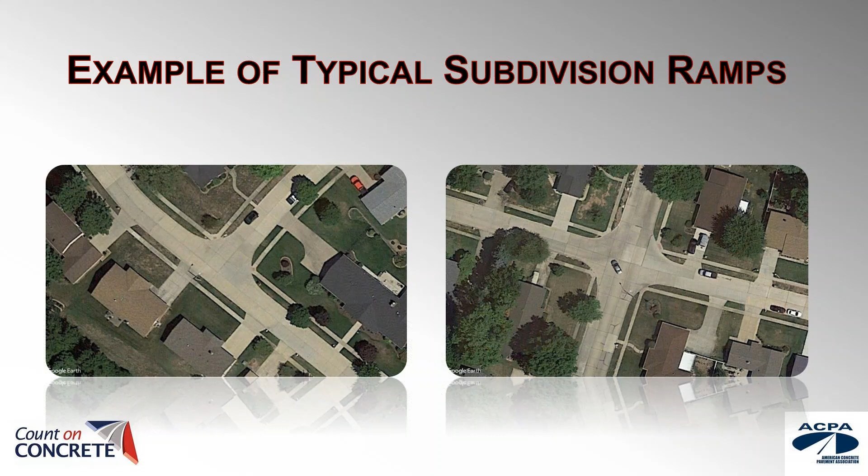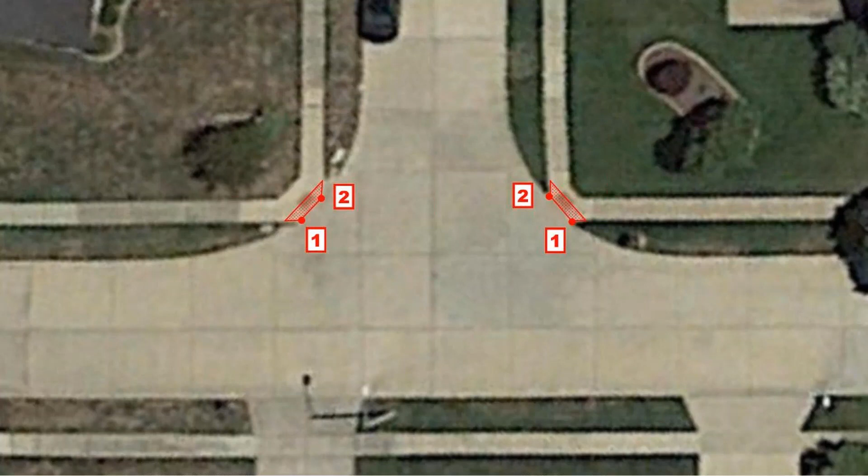Here's a typical subdivision-looking existing street, ramps that need to be upgraded. I go to the inside of each of the sidewalk paths, assuming there's two, and I put dots onto the pavement like this—going back to the private property side. I protrude that line and put a dot. What I've done is defined my opening. That's where I know my domes are going to go, and notice how the domes go up the curb line 2 feet.

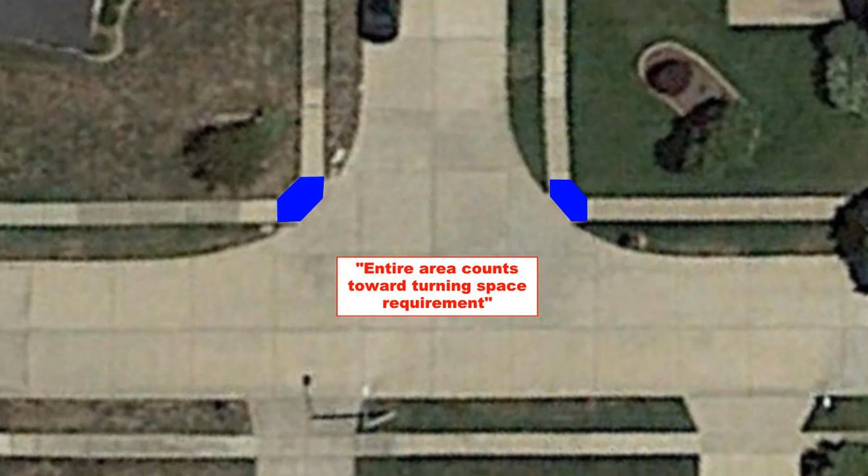That's also going to define where my bottom grade breaks go. Because my domes are on the radius, I need to put my grade break behind them. All that area becomes my turning space. So now I've got a compliant turning space, domes, and 2 foot in the direction I'll travel. From there, at most it's going to be 15 foot back up the ramp and 15 foot the other way. You can teach your survey crews this really quickly, and they can get you information fast for removal limits, should you ever want to do this per each. It just gives them an idea of where to go and how much information is needed, and you'll be able to get ramps in there during construction.

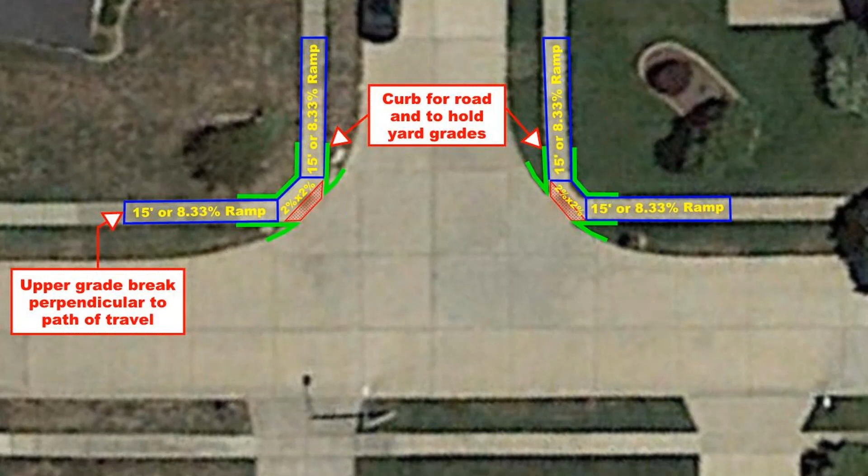Notice those curbs are in there, the green curbs—those are if needed, they're not necessary. So from there, if my street isn't roughly flat, and flat's 2% or 5% depending on where you're at, I need to put in a transitional segment, again if necessary. When I'm doing slab replacements, it's probably going to look like this—I'll take out that slab.